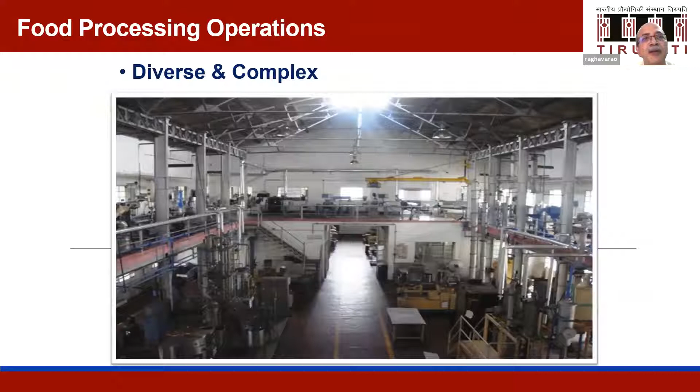This is the diverse and complex situation of food processing unit operations, a typical pilot plant at CFTRI. This is the basic transport phenomena that governs everything in processing. For example, heat transfer - conduction, convection, radiation. And in mass transfer - diffusion and mass transfer, and momentum transfer in fluid flow, hydrodynamics, and viscosity plays the role. But the real issue is the interdependency.

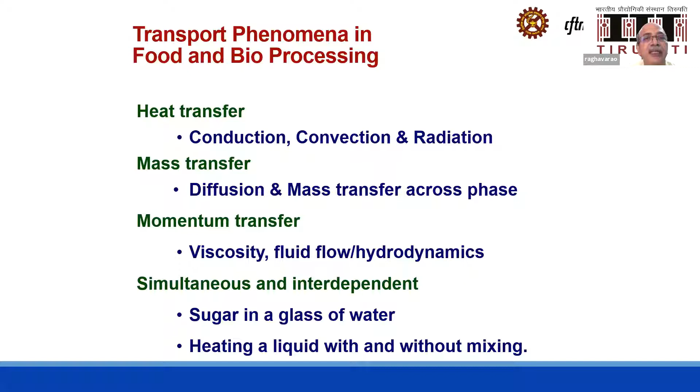See the interdependency, how momentum transfer influences heat transfer. For example, you have a glass of water. If you simply put sugar in it, it will take at least 60 seconds for the glass to get all the water sweetened.

But if you take a spatula and stir it, it happens within 5-10 seconds. What is happening is when you stir it, all the particles are suspended in the system, and an enormous surface area is exposed for mass transfer. Whereas in the other case, only the cross-sectional area is exposed for mass transfer. That's why enhancement in the area increases mass transfer, and diffusion occurs all over the place. That means convective mass transfer superimposes on the diffusive mass transfer, and overall mass transfer increases.

Similarly, when you are in a hurry, you rotate your coffee glass so that it gets cooled fast. Unknowingly, you are applying the principle. You know that rotating the glass will cool your coffee fast. Why does momentum transfer increase heat transfer?

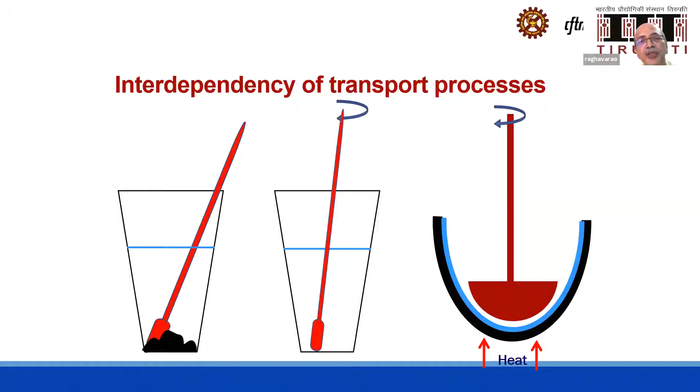Because from the heating zone, the first layer of liquid elements in contact gets heated. Then by conduction, they have to come step by step. But if I do agitation, the hot fluid element is brought to the cold side, and the cold element is brought into contact with the hot surface. That's why the effective gradient, not the real gradient but the effective thermal gradient, will increase, and my heat transfer will increase. But in food, the situation is a little bit tricky.

It has protein, fat, carbohydrates, and a lot of moisture as well. The moisture reduces during processing, and so porosity also reduces. So all the properties like density, porosity, viscosity, and thermal conductivity, which are supposed to be assumed constant, are no longer constant. That's why mathematical modeling for prior prediction becomes a very, very challenging job. That is the tricky situation in food processing.

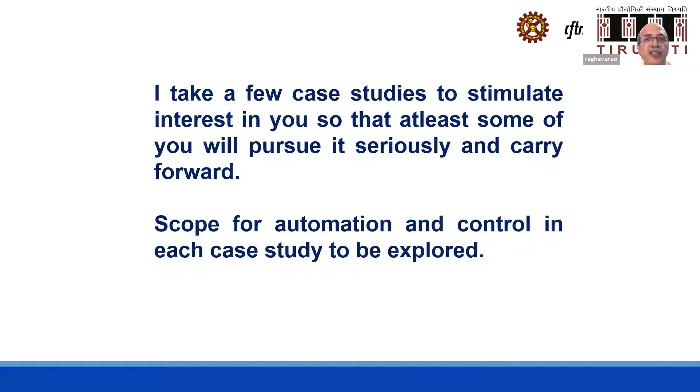So I will take up some case studies to stimulate your interest, so that at least some of you pursue them seriously. Then the purpose of this talk will be considered fulfilled.

You must be knowing that fluidization is a unit operation in food processing or chemical engineering. The conventional chemical engineering fluidized bed, which is a vertical cylindrical unit, is not suitable for food systems because food products have high moisture content and irregular shape. That's why this process becomes very energy intensive.

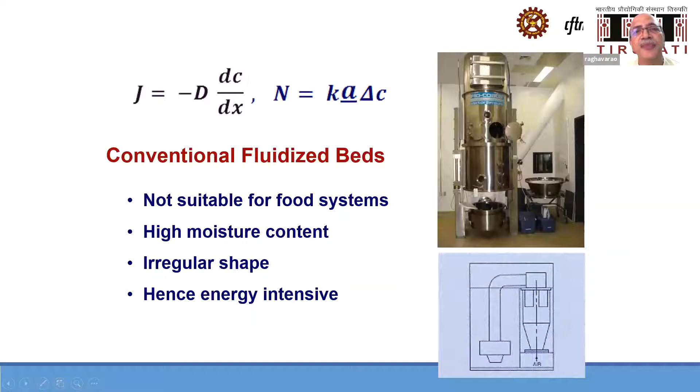This is Fick's first law, you are familiar with it. The same thing can be expressed as N equals Ka delta C. Now what is in my hand? Delta C I cannot change because it is decided by the system. Mass transfer coefficient also I cannot change much because D is also fixed. What I can do is increase the area.

So that's where I can play a role to get an increased surface area. The first step towards that is, instead of having a complete cylindrical thing, I have only one hole at the center and the entire gas comes from there. The pressure drop is very low and it fluidizes only a fountain, and that material comes back, waits for its turn, and resuspends again. This is called a spouted bed. It is very, very low energy consuming.

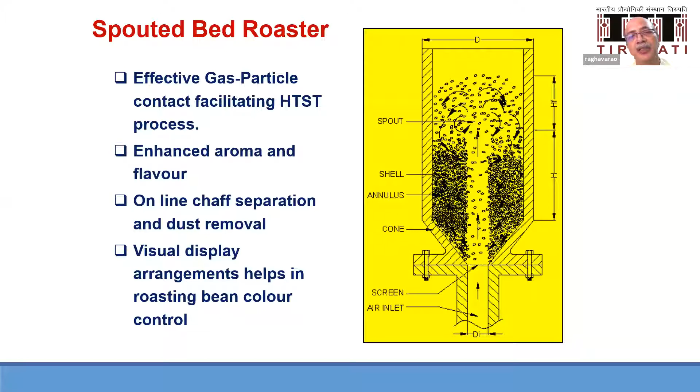That's why we have applied it for some of the lab scale processes, for example coffee roasting. If you go into the market, this is the machine you find in a coffee shop where roasting happens. Inside this, it is a conduction based, high temperature, long time roaster. Once roasting is done, the material is brought here and cooling starts, but without knowing that the damage is already done.

That's why, with the support of DST, a spouted bed roaster is designed and developed here, which has a transparent cylinder so you can watch the product.

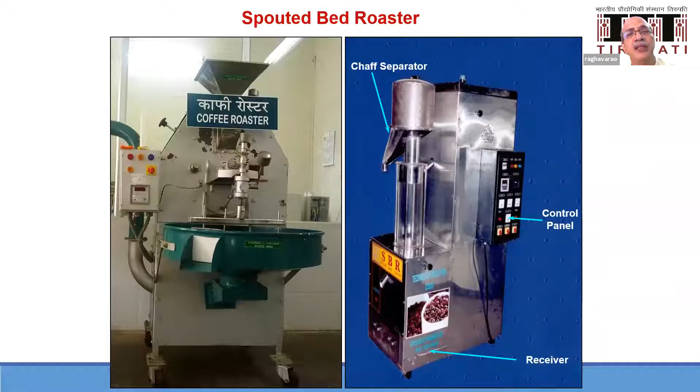At best, it can be semi-continuous. So the cylindrical bed is made horizontal, and a very thin bed is used, with thickness on the order of 10 to 20 millimeters. Even then, fluidization is achieved by mechanical vibration using springs.

Heat transfer is done only by a small amount of hot air passing through. Instead of indirect heating, LPG is burned directly and mixed with fresh air, which has a lot of residual heat that is recycled. We have integrated this into a vibrofluid bed feeder.

Then you have the first roasting system. After roasting, there is another deck where no hot air is used, just vibration, so some resting takes place. In the third deck, instead of hot air, cold air is passed and the product is cooled. So at the end of the 3 decks, the product comes out roasted and cooled.

This was especially necessary because most food products use roasted wheat. Traditionally, roasting is done by sand, and sand particles remain in the crevices of the wheat particles, causing babies to get stomach pain because of silica contamination.

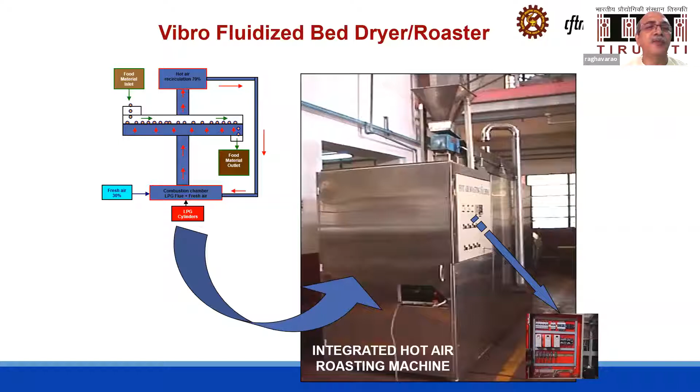This is a hygienic alternative, also using a different fuel - instead of diesel or petrol, LPG gas is used as an alternate fuel, supported by the Ministry of Petroleum project. It's versatile, not just for suji or wheat, but also for cornflakes, vermicelli, fryums, and other irregular shaped bodies.

Essentially, human beings have taste buds on the tongue - if you can pass the tongue, every product is acceptable. So instead of having high deep fat fried food, we roast this material and give a spray of oil. The product will have minimum oil uptake, say 5%, but still give a good mouthfeel, saving both in terms of fuel and cost. This vibrofluidized bed is very effective.

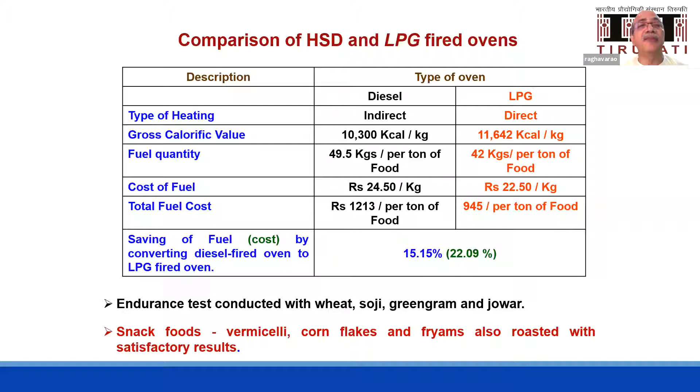Then another thing is field assisted drying. Especially in difficult situations like cashew, where a high amount of fat is present, the matrix doesn't allow moisture to come out. If you do conventional heat transfer, heat has to go from outside to the center, then evaporate the moisture, and the moisture has to come out - both heat transfer and mass transfer are in opposite directions.

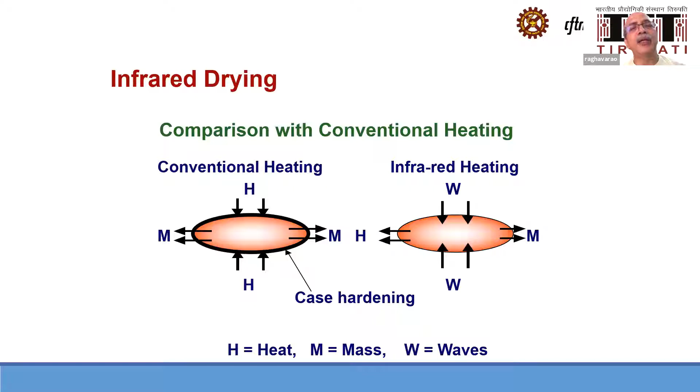Whereas with infrared, on incidence it releases heat, so both heat transfer and mass transfer are in the same direction. This was previous work with a vibrofluidized bed dryer, done by Dr. Venkatesh Murthy, who worked with me for his PhD, and also my colleague Dr. V.D. Nagaraj. This other work was carried out by Dr. Umesh Hebbar, who also worked with me for his PhD, but on a different system.

With the support of DST, it was fabricated in the CFTRI workshop. Then a bigger project was applied for, and a larger scale unit was designed, which clearly demonstrated that product recovery and nutrient retention are much better, and it's a cost-effective way of doing this.

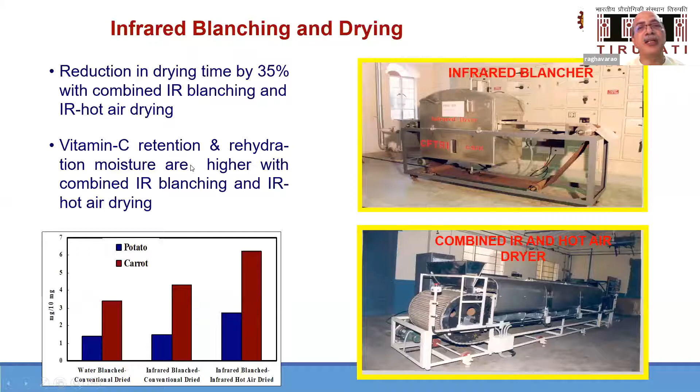Then liquid concentration - after drying, liquid concentration is another very energy intensive unit operation in food processing. Most fruit juices are concentrated for ease of transport and storage, requiring less space.

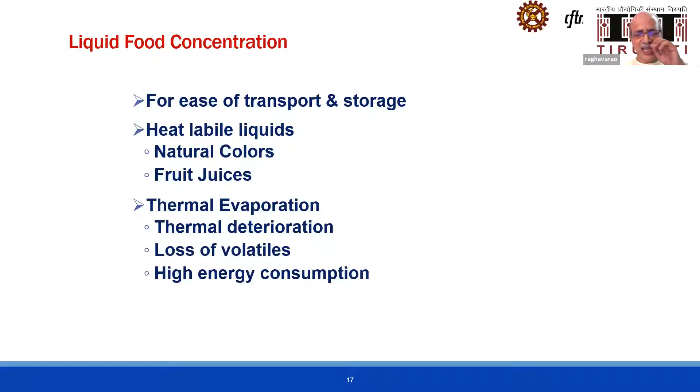Conventional processing is thermal evaporation, which itself has come a long way. Initially it was an open pan, then falling film and rising film evaporators, and state-of-the-art technologies like scraped surface evaporators, but these still have product damage by heat.

As I mentioned, this is the state-of-art scraped surface evaporator, but current industry practice uses reverse osmosis, because water is removed without phase change, making it very cost effective. But it has a limitation - it can go only up to 25 brix, above which the flux becomes so low that it's not feasible.

At that time it is switched over to scraped surface evaporator, and you can achieve further concentration up to 70 brix. But still there is heat damage.

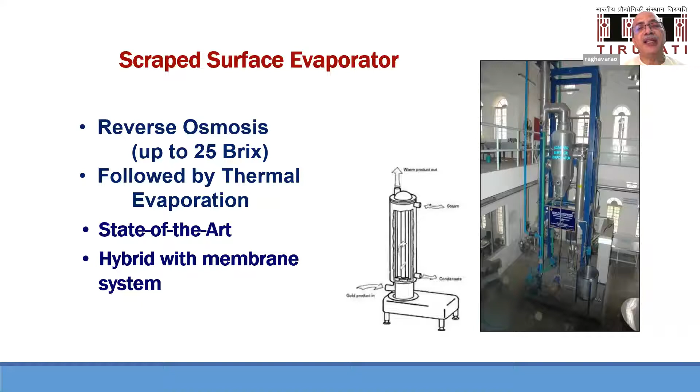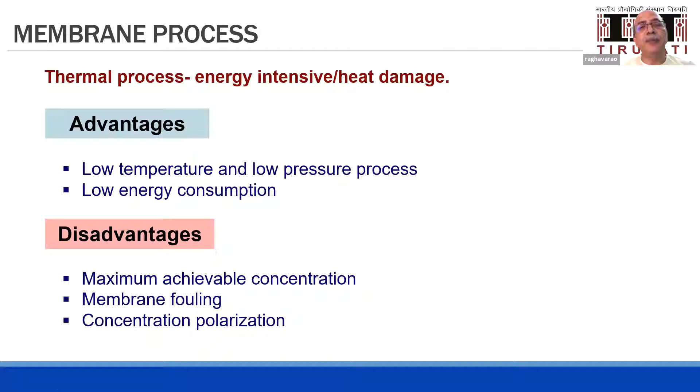So we thought whether we can replace this hydrostatic pressure difference in the membrane, like reverse osmosis, with an osmotic gradient, because reverse osmosis has serious drawbacks of concentration limit, as I mentioned, 25 brix, and membrane fouling. These are due to concentration polarization. All these drawbacks can be overcome if I replace my hydrostatic pressure gradient using an osmotic gradient.

So osmotic gradient means an osmotic solution is kept on the other side of the membrane, feed is here, and the moisture evaporates because this is a hydrophobic membrane, and it diffuses as vapor and condenses on the other side. So it's a very good scheme.

It is working very well for removal of water, concentrating from 25 brix to 70 brix. But flux is low because there is evaporation involved here. So then we replaced it with a hydrophilic membrane. Water is removed as water, flux is at least 2-3 times higher, and we are happy that it is able to concentrate the liquids in a much faster way.

But once you solve one problem, it will generate five more problems. That's how the research moved forward. So here the issue has become the back diffusion of the solute, because this is a high osmotic solution.

These pores are filled with water. So by Fick's first law, there is back diffusion, and I'm getting salt on the feed side. But you may say, what is the issue?

There is no issue if my feed is a vegetable juice, but definitely if I'm using a high value compound like phycocyanin solution or any other material where salt is not acceptable, it will be very objectionable.

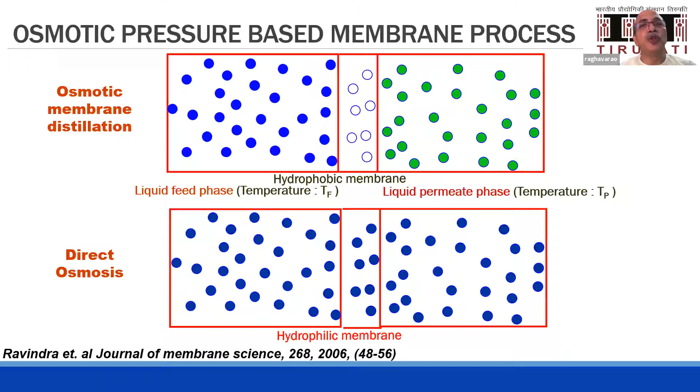But some of the things we observed were very, very intriguing and interesting. Normally, conventional wisdom tells that if the pore size is big, diffusion flux rate will be high, and if pore size is small, flux will be small.

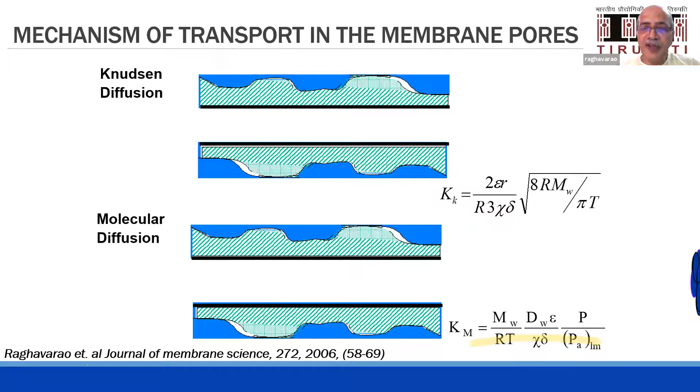A crude example I can give is like when you go to a movie theater: if everybody stands in a single queue, everybody gets a ticket very fast, you will reach the ticket counter quickly. If everybody makes a rush, rubbing into each other, then it will be a delayed process. Same thing happens here, and still the flux is low.

Then we try to keep an acoustic field to increase the concentration, to disturb the concentration polarization, so that I will get higher flux. I don't know, for some reason the animation is not working.

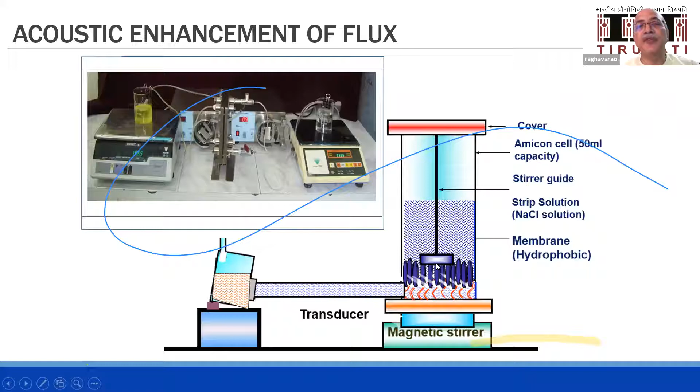This is the hydrodynamic concentration polarization layer between the stirrer and magnetic stirrer on the hot plate. I have put my acoustic transducer. These are the acoustic ultrasonication waves which stir it and give me higher flux.

Then traditional Indian foods is another area where multinationals are not interested, or they do not have the required expertise.

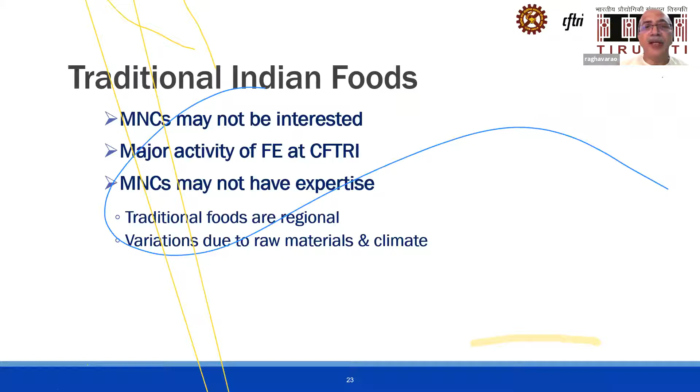So that has been one of the major activities at food engineering. And nowadays, especially in the COVID situation, traditional Indian foods have gained a lot of importance.

This is frying, which is a type of drying - removing the moisture, but at the same time adding the fat. The vada is formed here in the hot oil, in the racecourse pond. The formation unit is a coaxial cylinder, so around the cylinder it forms a donut-shaped vada.

They have a specific residence time, and each time while they travel in the path, there are propellers with a dip below these paddles so that they turn around, exactly imitating what the grandma does by shifting the vada to the other side for frying. By the end of 2 minutes, it comes out of the unit.

And you get 400 to 600 vadas per hour. ID company, as you know, is a startup started by some IIT young graduates like you guys. They started the ID company and they are very, very successful. They took the technology from CFTRI for idli batter and also for vada, but they used their own innovation.

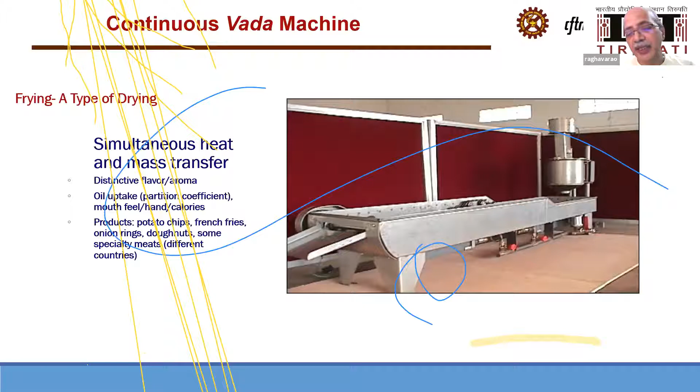Otherwise, nowadays the modern young girls - I mean, sorry, it's not gender bias, but it is a fact - they are not equipped to form these vadas like their mothers or grandmothers did. So it is a very, very beautiful innovation, and that's no wonder ID is so successful.

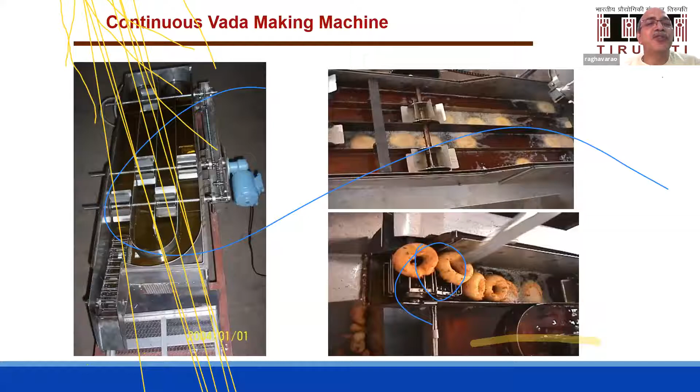Now they are coming out with much more innovative products into the market, including coconut, tender coconut water, coconut grating, these kind of things.

So this is another product like that - puri. Puri is a very good product, but it has 33% fat. So that's where we cannot call it a health food any longer, or even good. Not only is it not a health food, it won't qualify even as a good food.

So then we took that problem and extruded it pneumatically, forming a sheet and using a rotary cutter so that you get squares. Actually puri is round, but if you make a circle out of this, the corners of the square will have to be recycled, but the rheology changes when you recycle it. That's why we started calling it a squarey instead of a puri, but shape does not matter.

The best part is the fryer has 3 limbs, 120 degrees apart. Each time, one of the paddles will keep these puris submerged in the oil. The oil is a minimum quantity you can manage in this design of fryer, and you get minimum uptake of oil.

The oil uptake is about 13% compared to 33% in a conventional, even grandmom-style, puri. Why is it like that?

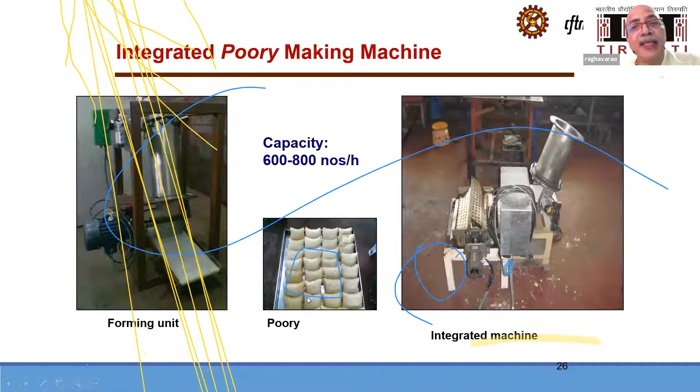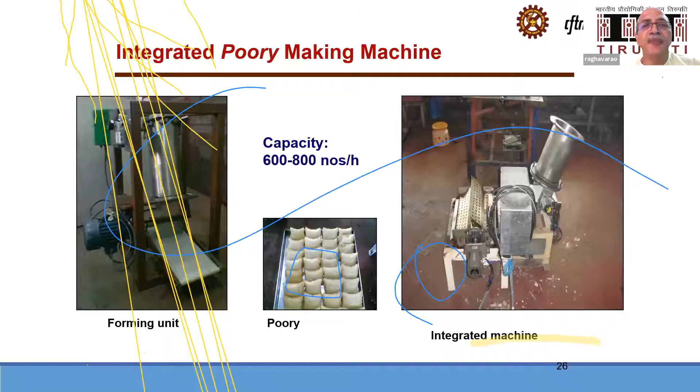A PhD student has completed his work on this, but it still has to be carried out at CFTRI or elsewhere to find out why pneumatic extrusion gives less oil uptake. If you look at regular puris, one side is very thin and one side is very thick, whereas here you get equal thickness on both sides. So it has not only energy efficiency, but also very high sensorial quality.

Another area we have taken a deep dive into is downstream processing. Downstream processing is an important area of biotechnology. People assume that once you produce it, it's not a big deal to purify it, which is not true. World over, many processes will not see the light of day because downstream processing becomes very expensive - 85 to 90% of the product cost will be accounted for by downstream processing.

That's why you have to use several unit operations: extraction, filtration, centrifugation, drying, crystallization - so many unit operations you have to use. Each unit operation, even though it is 90% efficient, if you have to use 5 unit operations, the overall efficiency comes down to 50%.

90 into 90, 80, 80 into 90, 70, 70 into 90, 60 — like that, each time the overall efficiency after 4 or 5 steps falls below 50, and productivity won't be an economically viable proposition.

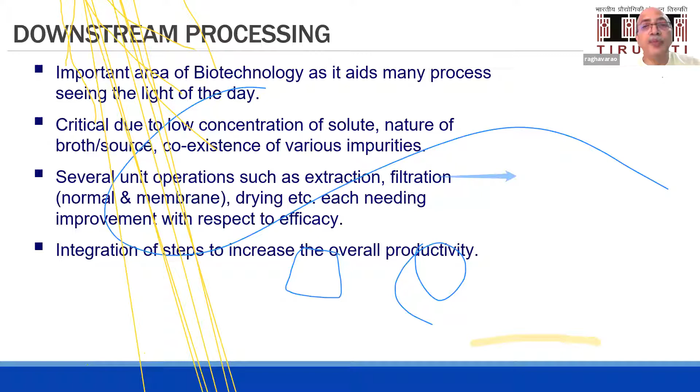That's why we proposed aqueous two-phase extraction, where the entire downstream processing I cannot cover in this lecture. Only one unit operation of extraction I am taking and comparing.

Conventional organic-aqueous extraction is not suitable for these enzymes, which eventually find their application in food products, because it denatures them, and the solubility of these biomolecules is very low in these solvents.

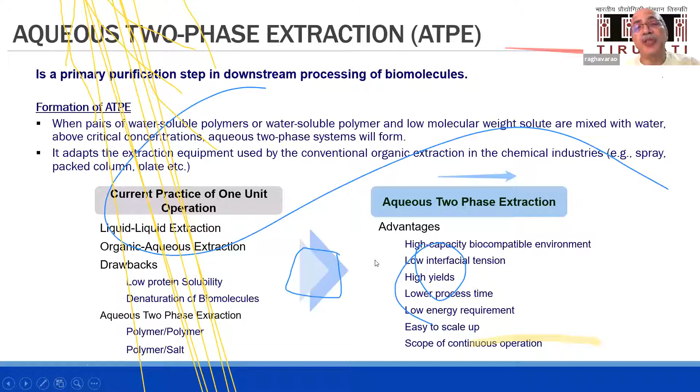That's why aqueous two-phase systems are used, where a typical case study I will take is phycocyanin. It is from the raceway pond — it is grown, harvested, homogenized, and you get a clear slurry, crude extract of algal Spirulina platensis. Phycocyanin is a very high value addition because Spirulina is 30 rupees a kg, whereas once you purify it, it is 1 lakh rupees a kg.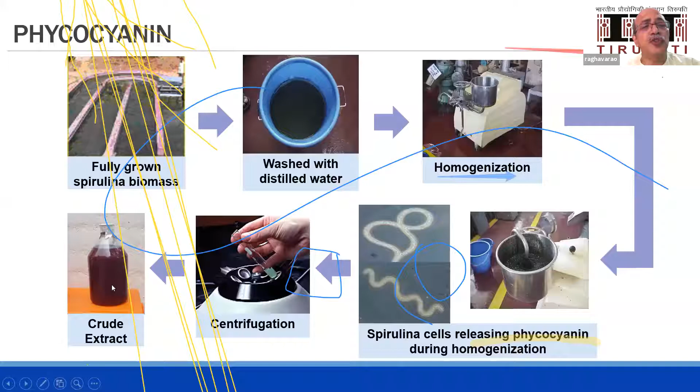So different phase systems are used. Phase diagram — the chemical engineering concept of volume ratio and equilibrium concentrations, tie lines — all these concepts are used so that you can concentrate into a smaller volume in a very concentrated way. Even membrane processing itself is a very efficient way to concentrate, but here I am concentrating even without using membranes. Just by designing my aqueous two-phase extraction properly, I'm getting a much better extraction.

We thought whether we can simplify this downstream processing using aqueous two-phase extraction. To our surprise, we could get fractionation of APC and CPC in a single step of aqueous two-phase extraction, to our satisfaction. We could achieve a product of much higher purity compared to what is reported in the literature.

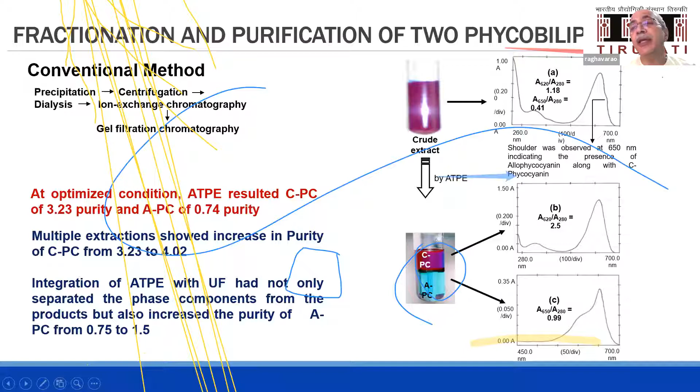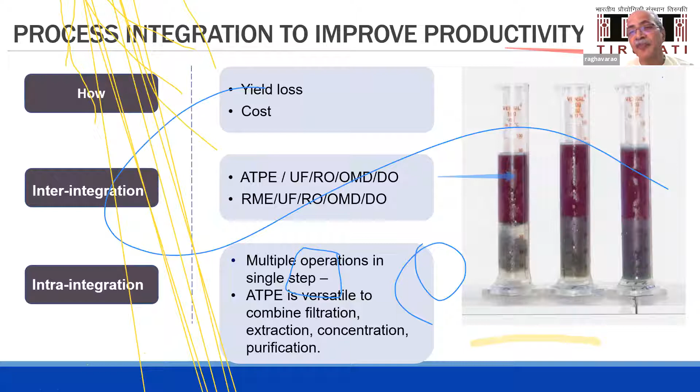Then, as I mentioned before, I can play around with the volume ratio and achieve an extracting phase volume that is very small, so I can get the top phase into a smaller volume. So I'm getting a concentration which is membraneless — without the need of a membrane, I'm achieving concentration by properly designing a single step of aqueous two-phase extraction.

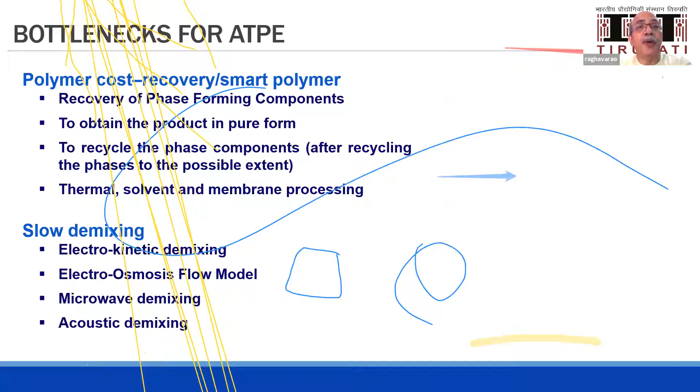But as I mentioned, it is not true that everything is rosy for a given technology — it has several bottlenecks. First of all, there is a high cost of the polymers, the phase-forming components required for aqueous two-phase systems. This is partly addressed, to a large extent, world over by smart polymers, low-cost polymers, which can be very easily separated out and recycled and reused.

Another issue with aqueous two-phase systems is that for extraction, because of the very low interfacial tension of these phases, mass transfer is very easy. It is not a mass transfer limitation.

But the equilibrated phases, when they have to be separated back into individual phases, that is a difficult thing. The phase demixing is a very slow process. Why is it slow? Because the delta rho, the phase density difference between the two phases, is very low, and the viscosity of the continuous phase is very high.

So because of this, instead of forming a dispersion, the system forms an emulsion. You know the difference: a dispersion, in the absence of stirring, will demix separately easily, whereas an emulsion is very stable. For example, milk is a very stable emulsion. It won't separate on its own unless you add a drop of acid, change the pH, coagulate the protein, and it will demix.

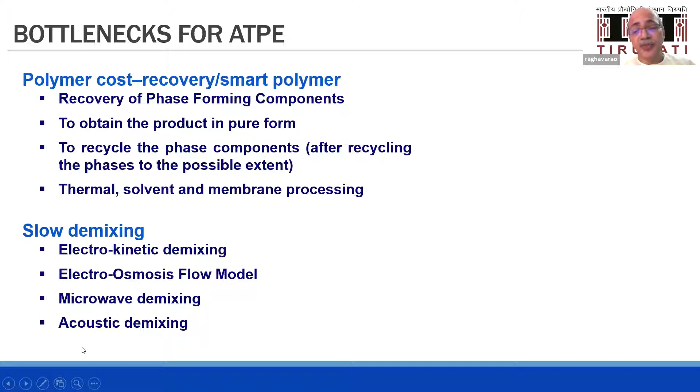For the electro-osmotic thing, our collaborator was University of Colorado. NASA asked them to conduct experiments in zero gravity, where a centrifuge will not work. They wanted to conduct extractions there using an aqueous two-phase system, to see whether we can develop a method for extraction and phase separation without the need of gravity.

So the first thing that occurred to us was that because there are salts in the aqueous two-phase system, they partition unequally between the phases, and they develop Donnan potential and Zeta potential. Zeta potential is the surface potential which gives rise to mobility of these droplets in the presence of electricity. So we thought using electricity is the best bet.

So in a cylindrical column, we took the aqueous two-phase system, applied two electrodes on either side, and applied the electric field. For phase demixing, when the top electrode is positive and the bottom is negative, we call that normal polarity. That worked very well, and we could get about 2-3 times faster demixing compared to gravity alone.

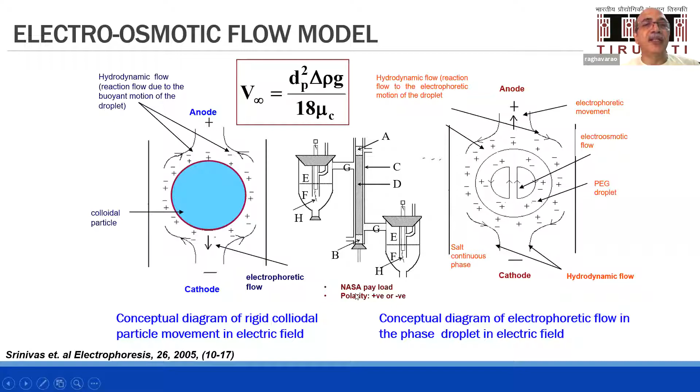That's how the demixing is at a much higher rate when negative polarity is used compared to positive polarity. So that's how we have solved the two paradoxes that are bothering the scientific community world over. What is the paradox? Paradox is truth but apparently looks false. What is apparently looking false? The phase demixing, the direction of the droplets is opposite to that predicted by conventional colloid electrokinetics or conventional wisdom.

So on the face of it, our observation is wrong, but we could explain it based on the electro-osmotic flow model that I explained to you just now. Phase demixing rate increased irrespective of the sign, and the migration increased with increasing size of the droplet. Normally, as size of the droplet increases, velocity should reduce - that is the conventional wisdom. But here we found that even as droplet size is increasing, electrophoretic mobility is also increasing. Again, the answer lies in this electro-osmotic flow model.

Satisfactorily, we solve these paradoxes. But that is not only of academic interest, we want to derive a practical utility of it. What is the practical utility? This is the conventional spray column that is used in the chemical industry. Aqueous two-phase systems of low interfacial tension, as I mentioned, form an emulsion at the top. This emulsion is difficult to separate.

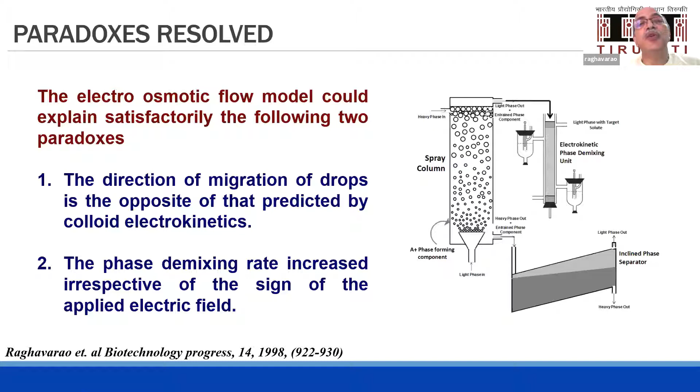So here what I'll do is connect this to the electro unit - I have not shown that here. So this one is subjected to electrophoretic separation, and the bottom phase is recycled back. At the bottom, we'll just use the inclined separator for the phase demixing, so that the spray column can be used in a continuous mode without the problem of slow demixing.

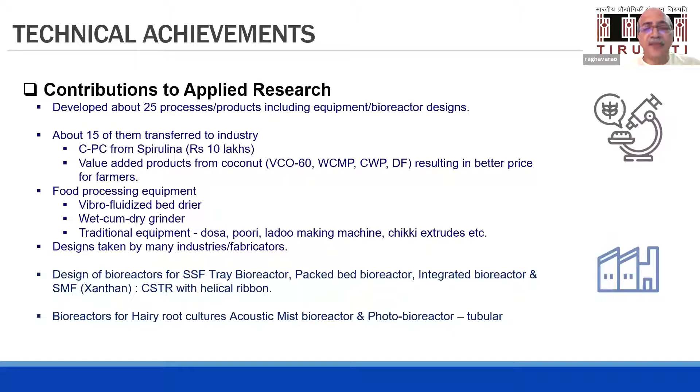So I'm coming to the end. This is the summary of several things we have done over the years of research. There could be good contributions to basic research because we resolved these paradoxes as I mentioned. Osmotic dehydration we explained based on mathematical modeling, especially why, when you apply vacuum, the osmotic dehydration rate increases - we explained that based on mathematical models.

And all these traditional foods we designed based on heat and mass transfer analysis. For example, take a dosa machine, which I have not explained to you - we showed that the type of heat transfer is more important than the quantum of heat transfer. That means the heat has to be by conduction only. Only then will you get the crispy crust of the dosa, the porosity, and the flavor that is developed. So if you hang the dosa and give the same amount of heat by radiation, you don't get it.

A similar thing we demonstrated through tandoori roti. In the tandoor, if I hang the roti at the center and give the similar heat by radiation, it won't give the same product. It has to be against the wall - it has to form that crusty bottom. Only then will the flavor develop.

Then coconut - several PhDs have worked on coconut. Four PhD students, latest being Archana, developed a lot of products and processes based on coconut. And about 19 PhD students have worked on C-PC and other areas - phycocyanin and aqueous two-phase extraction, modeling of drop formation, aqueous two-phase system, phase demixing, field-assisted demixing, all this.

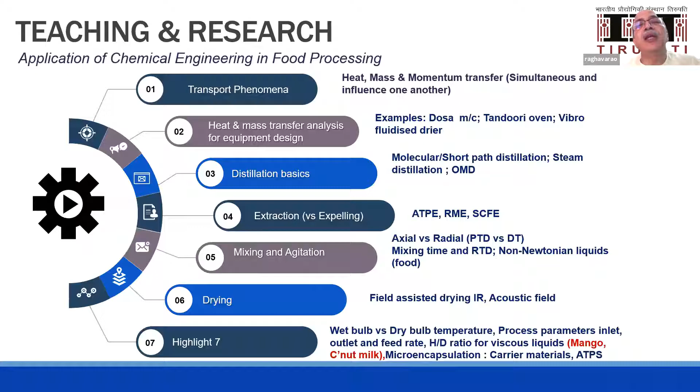So we continue our journey, and I'm still in association with CFTRI - we have an MOU between IIT and CFTRI. Similarly, I look forward, if Professor Uday is agreeable, we'll be happy to collaborate with ICT Jalna as well. As I mentioned, innovation-based research is important.

That is the 10x principle we should keep in mind, all youngsters - either you increase performance by 10 times or reduce the cost by 10 times, only then will you be in the business. Just doing some delta, small incremental research, won't take us long - out of the box thinking is required. So all these paradoxes are required to break the myth and look into new directions. For example, we have applied acoustics for aqueous two-phase demixing.

But including our research council, they said no, it is not possible. Acoustics will give energy to the system. How will acoustics give demixing? I could not explain, but it was my hunch that yes, it works. But because it's not approved in RC, I could not take up that work.

When I went again for sabbatical, after spending 7 years at CFTRI, a couple of years again, I went to University of Colorado. There I tried using an acoustic system for demixing. It worked.

Then again, we modeled how that is working, because it is increasing the circulation currents. Those circulation currents are increasing the collision frequency of the droplets. Collision frequency increase is resulting in increased collision probability. That's how the phase demixing has increased.

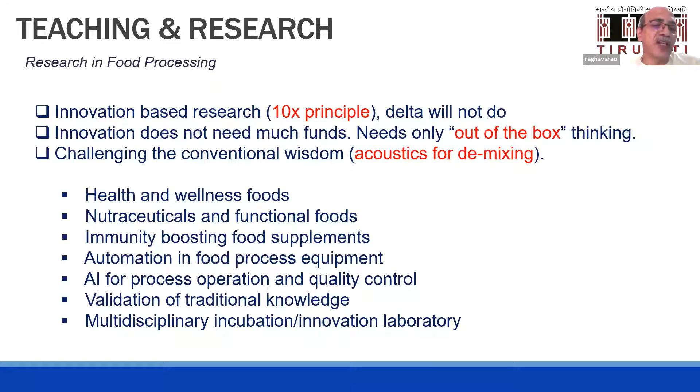So I'm happy to announce my first project here: an innovation and incubation center for food processing is sanctioned for 2.6 crores, and the construction and procurement of equipment starts this month.

A similar exercise I did at CFTRI. Many of our own PhD students have become successful entrepreneurs. That was really satisfying for me. I conducted a lot of industry outreach, inviting industry for their collaboration.